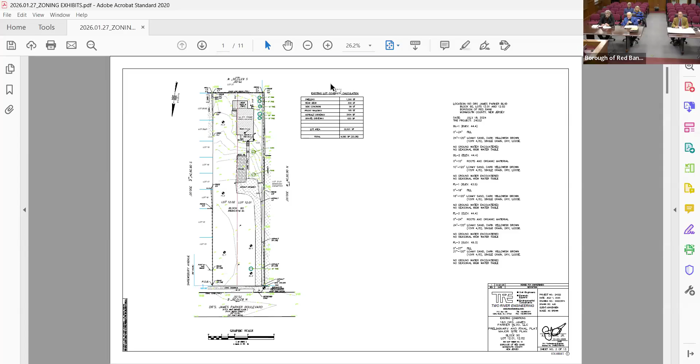Based on the comments made at the last meeting, we made an architectural change to the fenestration pattern on the front building, the building closest to Dr. James Parker Boulevard. That also necessitated a slight change on one of the side elevations.

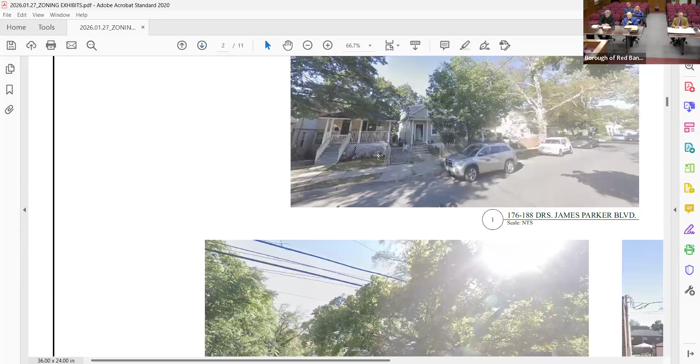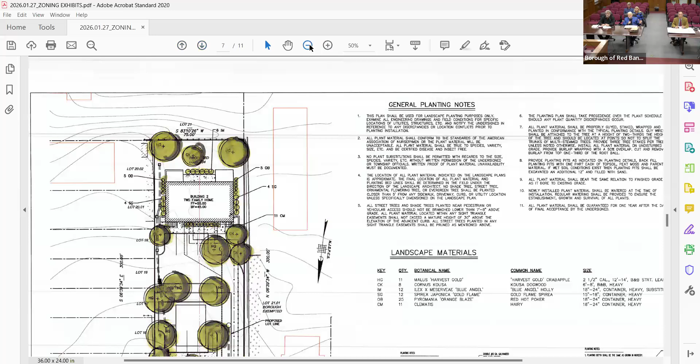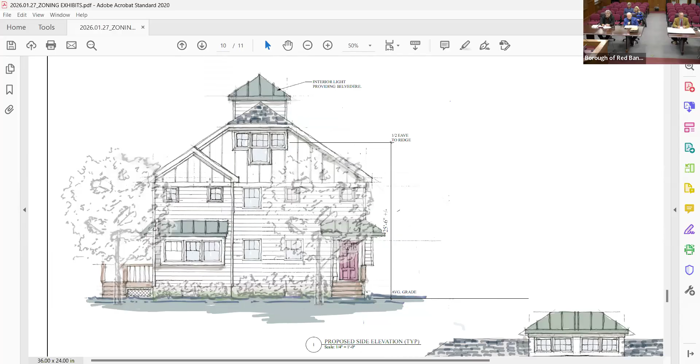This element is a Belvedere, which again, we spoke about last time, and that's a passive solar device. So what this does is the unit's split in it, and this lets light into the core of the building, which is what a Belvedere did in the houses in this area when the house got to be more square than rectangular.

And then these windows are all operable. So what happens on a nice spring day, if it's 70-something degrees out, you don't have to turn the air conditioning on, because you open these windows and it creates what's called the flume effect. The air will go out, exit, and there'll be a natural convective current inside, which will make the house more comfortable.

And again, that's an old device that's reused for contemporary applications.

Also, I think in the engineer's letter there was a question as to whether the attic or basement were going to have living space, correct? Not initially, although they are done to accommodate that if that's something that eventually wants to happen, and then they have to come back here. The physical ability to do it is there. So in the basement, there's a legal egress window, and the stair is a legal egress stair. And in the attic, it's a third the size of the floor below, so it can act as a half story, but there's no intention at the moment to finish them.

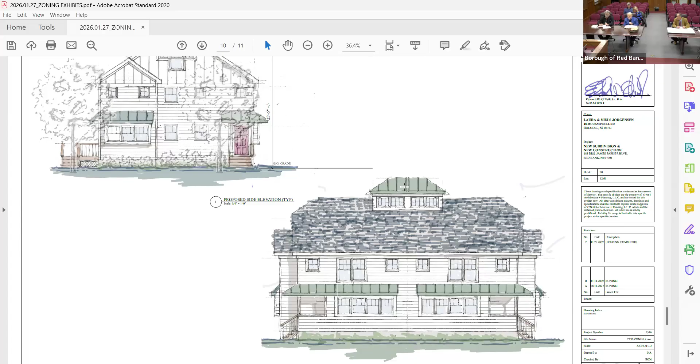Right, yes, and we have a drawing of, Sean, if you could go to the, please. Go in the other direction, so to say. Yeah, so this is the attic. And then on one of the other sheets is the basement. The floor plan shows the basement, but it's not a finished basement.

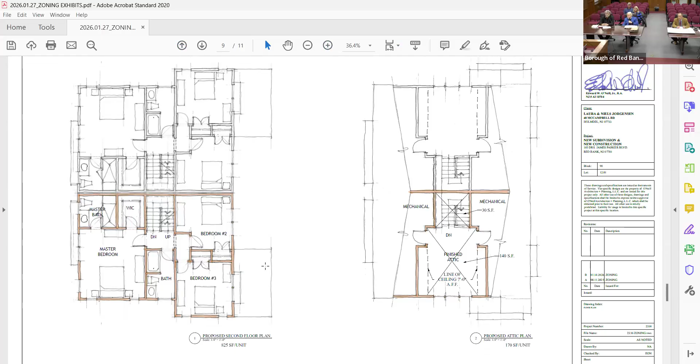And this is both buildings, right? Yeah, they're the same. Same floor plans. Just making sure.

Yeah, there it is, right here. So even though there's a bathroom there, the bathroom is really there as a future thing, if something wants to be done in the future. So the plumbing will be there, but for now it's just going to be mechanicals and storage. Yeah, and then the bathroom will just have the plumbing stubs, if you will.

So again, if they convert it, they wouldn't have to excavate. That's the basement, right here, yeah. And these wells here that you see, those are where the egress windows would be.

Oh, there was one other comment in the planner's letter, if I could address it. About the physical look of the buildings, they talked about having the buildings look more different. My position is that they will always look different because of their orientation. They'll never look the same. You'll have to make a real effort to look at them and think they look the same.

The distance between them and the orientation, nobody's ever going to know. And that's the reason why they're oriented the way they are. We had other configurations, but the idea was that they won't look the same.

Are there any questions for Mr. O'Neill?

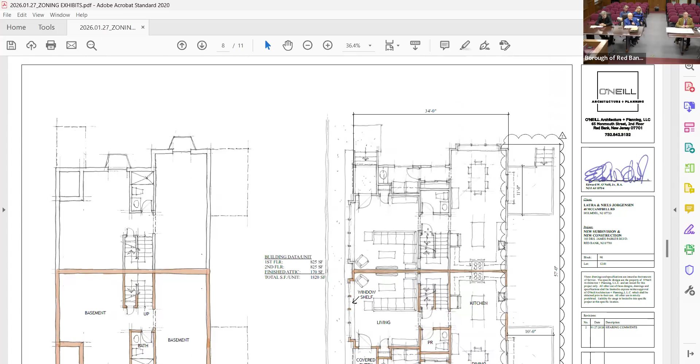Thank you. I have an exhibit, but maybe it's easier to just look at the site plan on your screen. This picture, is this good? Well, that's the old plan. If you don't have the new one, let me get that for you.

The 119 one. Maybe go back, you're going too far. That's probably the easiest sheet. Okay.

So basically, the major changes to the engineering plan were that we eliminated the two parking lots we had. We had two parking lots, which each had 4 parking stalls.

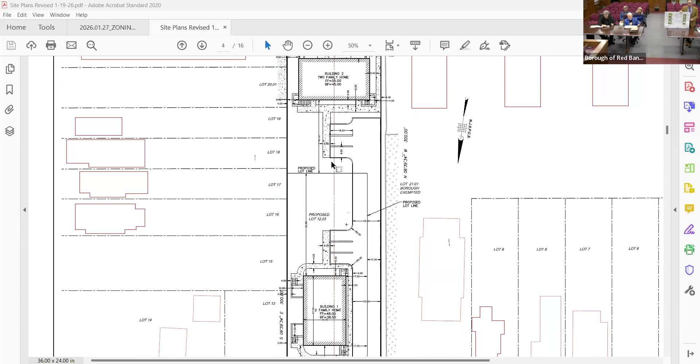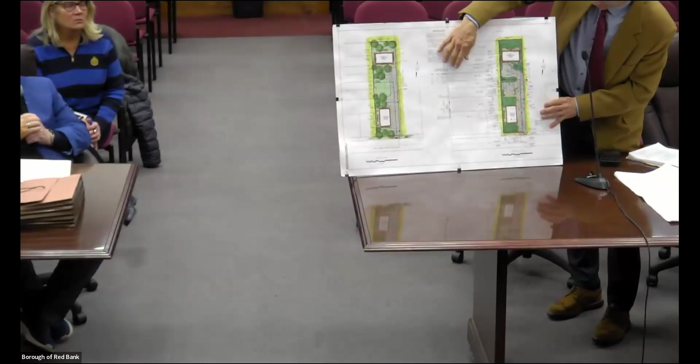Maybe I'll show my exhibit so I can point to things. It's a different exhibit, so I think we're up to exhibit A14. A14 is a colorized version of the landscaping sheet, also included in the site plan, page 7. What I did is cut the previous exhibit so you can see a comparison.

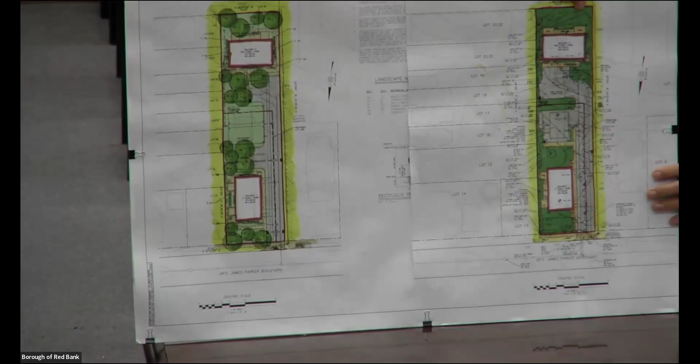Previously we had these two little parking lots, each with 4 stalls. They really weren't efficient as far as lot coverage, because you had one driveway and stalls on only one side. The board suggested we eliminate 2 of the parking spots and only provide 3 parking stalls for each unit, which we did. Because of that, we were able to eliminate both parking lots and just put 3 stalls off the main driveway, providing a lot less lot coverage on the property.

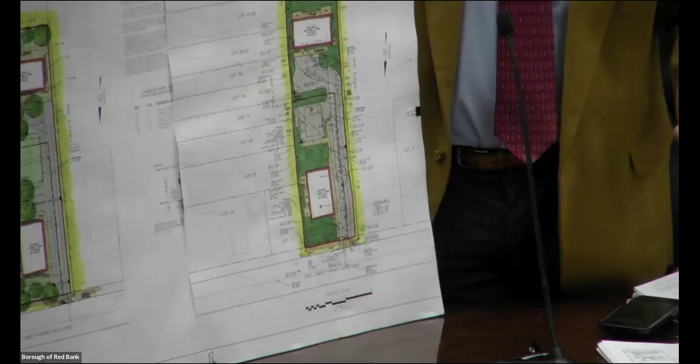Substantially so, really. We're able to provide a few more sidewalks now. Another question was where we'd put the garbage cans and how we'd take them out to the street. On the front building, we were able to split the rear decks. These decks are elevated a few feet, and where the stairs go down, we provided a little concrete area for the garbage cans, plus a sidewalk, so we'd have a hard surface to take the garbage cans out to the street.

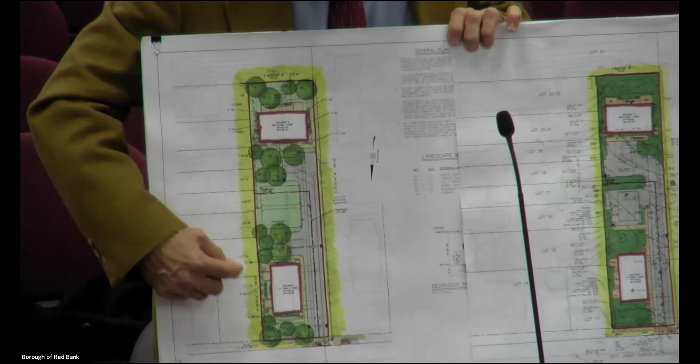The rear building, we provide the garbage cans in the back between the 2 decks, as well as a sidewalk to get it out to the driveway so they could take it to the street. We also showed where the condensers were going to go. On the rear building, they're going to go on the 2 sides of the building, and on the front building, it was going to go on the rear side of the parking lot, and we were able to screen all those. The garbage cans are going to be kind of behind 2 block walls where the stairs are coming down.

The redesign enabled us to eliminate - we had 2 underground detention facilities. We eliminated those and were able to put just one larger facility in the center of the area, which provided a much larger green area in the center of the property also.

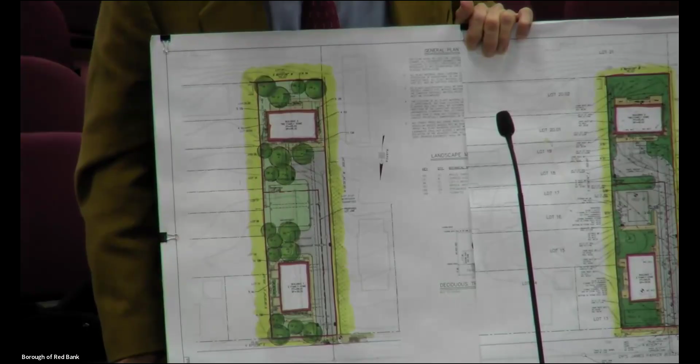Those are really the major changes. I did my best to address all of Jacqueline's technical comments to my ability. I think we cleaned up most of the technical comments. She certainly still has some more, but if the board were to approve the application, it would certainly be conditioned on meeting all of Jacqueline's technical comments to her satisfaction.

I just have a comment - I'm not sure if I sent the shade tree comment to you, Ed, and I apologize if I didn't. So their comments were that two street trees were required, but you're proposing 2 crabapple trees near the sidewalk, so they'll count that as for the 2 trees required. And then there's a sugar maple in the right of way, and that tree should be protected during construction. That's all the comments that we have.

Okay, it's fine. Can you answer Mr. Demento's question about the tree caliper? How many trees are you taking down? I believe there's 6 trees we're removing. So whatever we need to replace in the caliper, whatever we need, we'll certainly agree to that.

Jackie, you calculated it per the ordinance, that that's how many need to be installed. Correct. The ordinance takes into account the size of the trees being removed and how much needs to be replaced depending on the size and number of trees. They vary - the largest was a 36-inch tree in the front middle of the property. Then there's about 5 trees, a larger one in this area, and 5 trees along the back here. So for example, for the 36-inch tree, they have to replant 4 trees to replace one 36-inch tree.

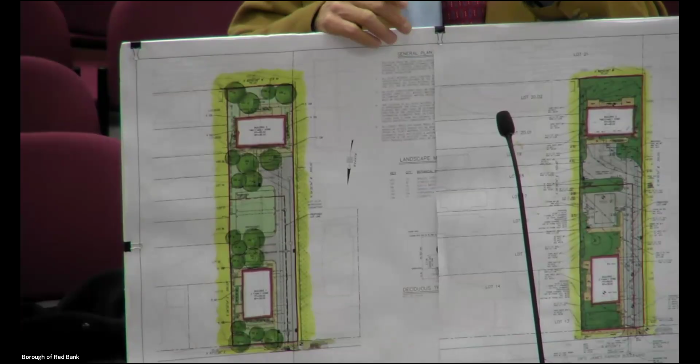Well, the Shade Tree Committee had no issues with the crabapple trees - they were happy about it. Sounds like they found it acceptable for the street trees.

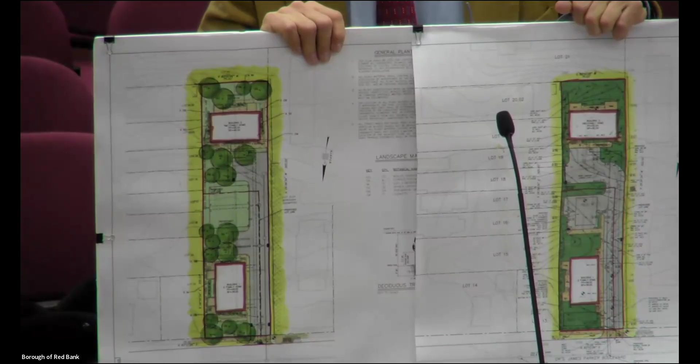So does that mean we should keep the crab tree? We just want to make sure. I would say so - if the shade tree has no issues with the crab tree, I'm thinking about the little rascals myself. Don't drink the milk.

Did we mark in the Shade Tree letter? You want to mark that in since we're referencing it as Exhibit B3? Shade Tree. Okay.

I have a question for the engineer - are you proposing generators with these buildings? I think that's maybe a question for Mr. O'Neill. He says no, there's no generators proposed. Okay, thank you.

But these are for ownership, correct, or rentals? They are being owned by the current owners of the property. They're going to start out as the owners, but anticipate at some time in the future they may very well wish to sell them. So they're gonna have to be - you're asking for a subdivision here, so, yeah, we are. So you're separating the 2 lots, okay. Correct, then there's gonna be an easement between the 2, if I remember. That's correct. Okay, thank you, I apologize. No problem.

So if the new owners would like to place generators, it would have to go next to where the condensers are. Correct, because that area has been cut out for utilities like that. So can we make that a condition in the resolution stating that any generators have to go in the same area as the AC condensers?

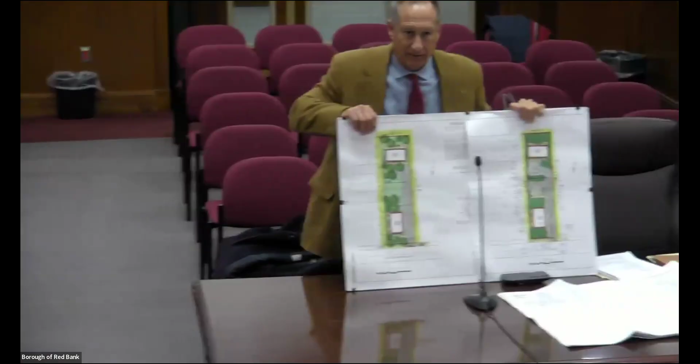on a flag lot, putting the property line down the center of the driveway. So you've got a flag lot in the rear, and then the front lot in front. And they'll have shared access, obviously, through the driveway in the future. And that's essentially because the property's 300 feet deep. How wide is it?

75 feet wide, yes. And that reminded me, and I apologize, that's exactly why we wanted the planner here tonight on our side, was for the flag lot situation, so I didn't know if you had any comments, Dan. Yeah, I think that's why we wanted him here, so if you can just comment. Close to the microphone. Sure.

Flag lots aren't ideal. I think the idea of having two family properties, I think is an appropriate location for it. I think as long as there's a suitable cross access easement, I don't really have an issue with a flag lot per se.

Would it have been more efficient to do something like a townhouse on the full lot? The lot is a little narrow, which makes it kind of hard to do a typical design. But you would avoid the flag lot issue. I think this is an okay compromise between having something more dense and keeping it the way it is, basically. Okay, thank you.